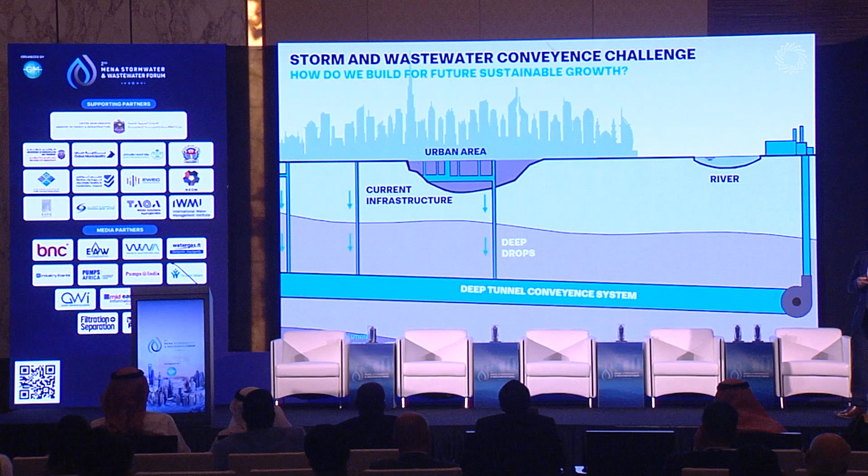So let's go back to the challenge. This is a typical city, and we may in the city have a challenge of increased wastewater production and increased stormwater production. And the existing current infrastructure is just now unable to cope with that increase. So the solution, as we've already heard today, is that we need to drop it deep into deep tunnel conveyance infrastructure, deep below the city. And then we rely on gravity to do the rest of the work, to bring it to the treatment plant, and bring it back up to the surface for effective and sustainable treatment.

These tunnel systems are being deployed all over the world. We worked on a project with the London Thames Tideway project, for example, with up to 30+ wastewater treatment drop structures. We heard about the Dubai strategic sewerage tunnel system earlier in the talk. And in Hong Kong, very significant stormwater infrastructure with flow rates of up to 210 meters cubed per second have been built.

The challenge, however, is when you uncontrollably release this water through a deep drop, the energy contained in that water is absolutely significant. It's explosive and it can do significant damage if not controlled. In fact, we've done some analysis and it shows that even a small drop structure, the energy dissipation is equivalent to that of detonating tons of TNT every hour.

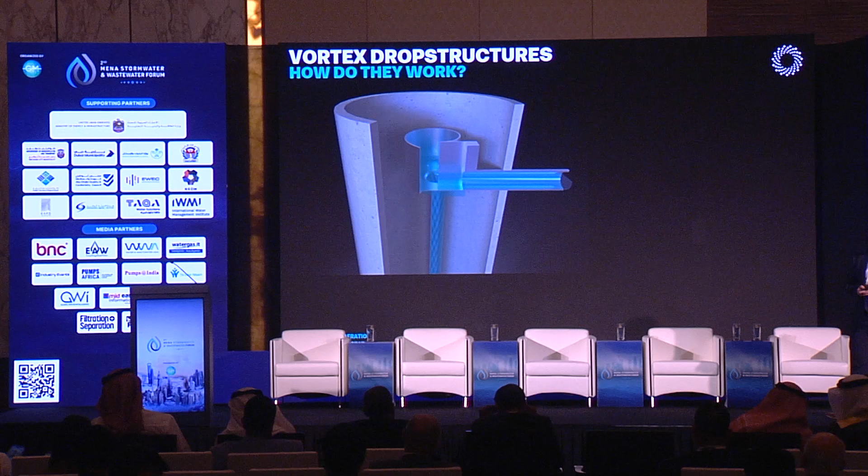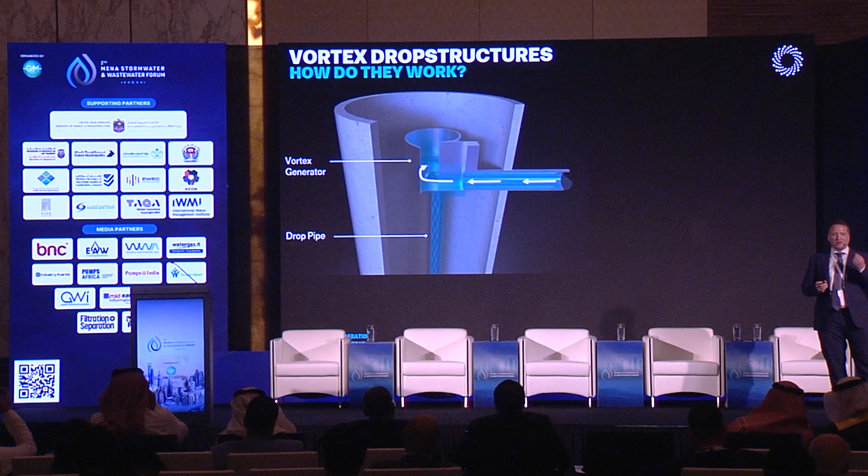So how do we manage this? How do we manage the chaos? Well, we do what nature does, and we organize the flow. We create a vortex. And a lot of you in the room will be familiar with this type of technology called a vortex drop shaft. And what we do to take this uncontrolled flow and get it organized, we convey it into a vortex generator. What the vortex generator does, it allows us to speed up that water. And then we convey it into a drop pipe.

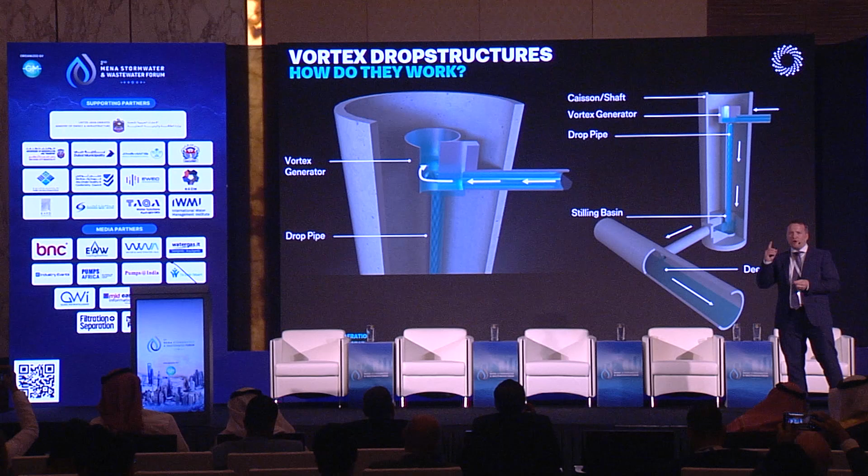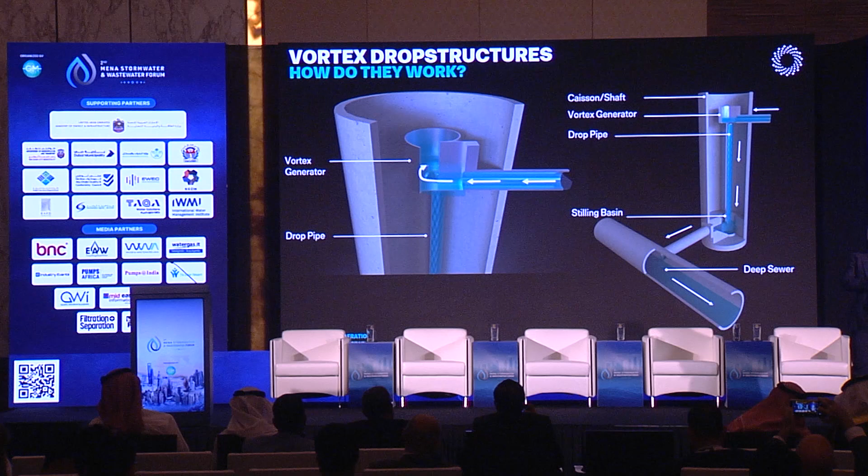Now a particle of water, as it moves into the drop pipe, is at high velocity speeds, and it exhibits a centrifugal velocity, or centrifugal force. And as it's traveling down this drop pipe, it stays on the drop pipe, and the high velocity and frictional effects result in very, very effective energy dissipation. We're talking up to 70 or 80% of that originally explosive energy is now dissipated in the drop structure. So this is what enables the sustainable development of deep sewer systems.

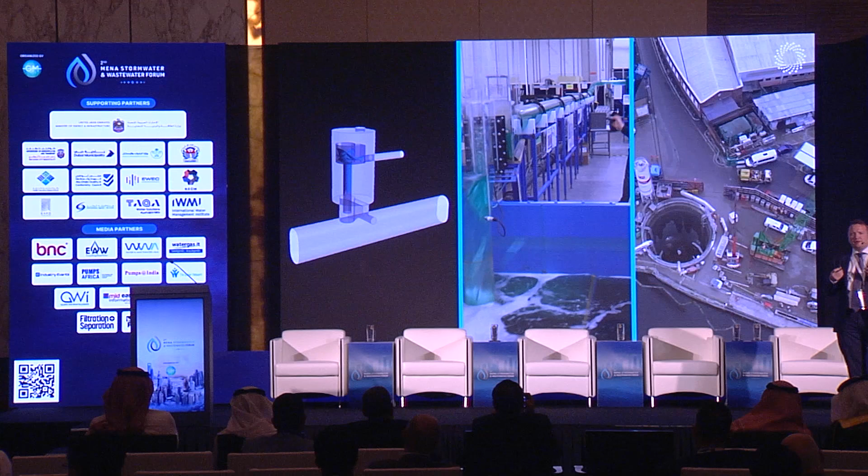The flows are relatively complex, so we need to use technology and tools to assess the performance of these systems. This is computational fluid dynamics on the left, but also we need to sometimes combine that with physical modeling to really provide insights and de-risk the designs to get it to a place where we can be very, very confident in the long-term operation of that infrastructure for the next 100, maybe 150 years.

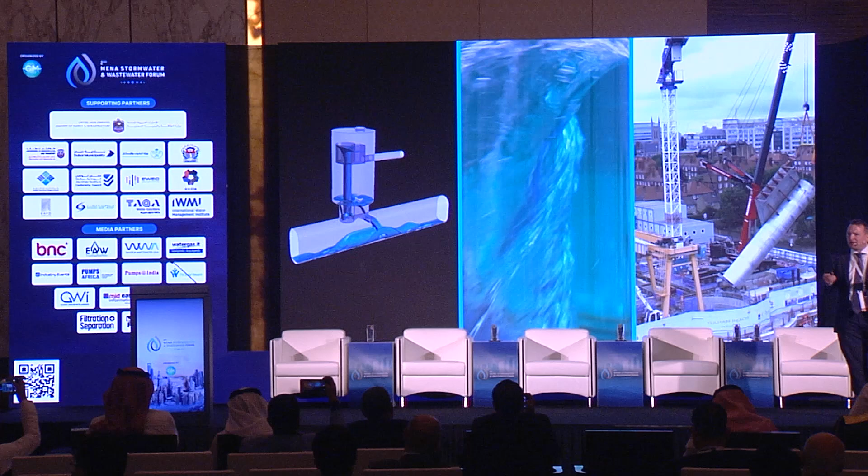So what I'm really excited to talk about now is what's on the left-hand side of the screen. We've now managed the stormwater and the wastewater, but now we have to deliver to a treatment plant where there's a whole host of new challenges. The main challenge primarily is we have huge volumes of wastewater that we need to now get to a better quality standard to enable water reuse. So we now have to do more treatment of more volumes of wastewater in existing aging infrastructure.

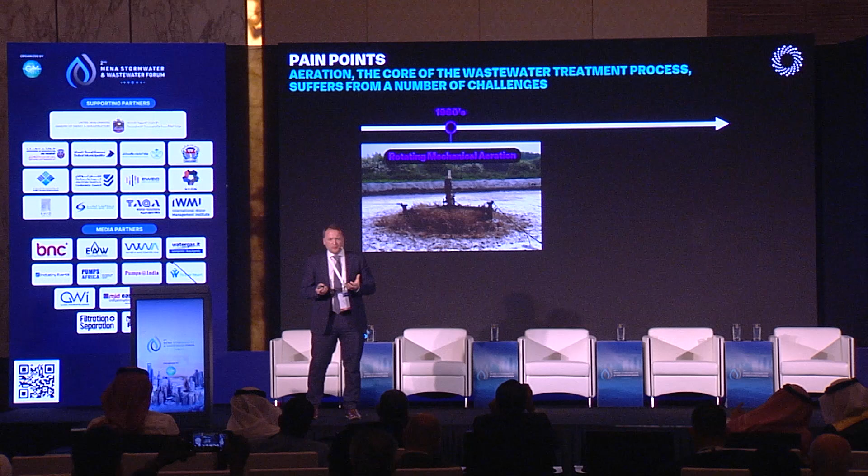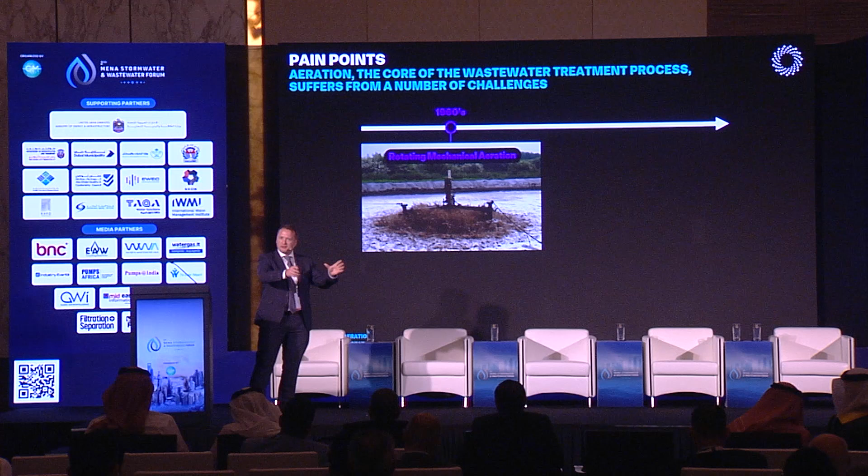And if you look at a traditional wastewater treatment plant, the heart of the treatment process is biological treatment, as a lot of you may know, using the aeration process. And on the screen behind me, you have what might be considered the first generation technology for aeration. It's called surface mechanical aeration. And the good thing about this technology is you can touch it, you can access the technology. But that's because you also need to maintain it. And it's also energy intensive.

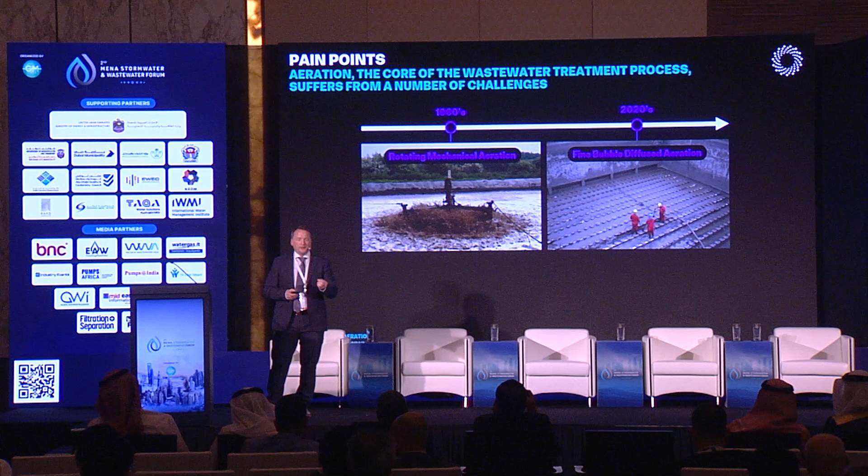Then you might have what's called the best-in-class technology, which is fine bubble. And the fine bubble is effective because it's efficient. However, the challenge is how we deliver that fine bubble today. We do it at the bottom of a tank through a diffuser. And diffusers inevitably clog, they foul, and eventually they break. So in many ways, it saddens me to believe that we're doing all this effective innovation and investment in the sewer system to bring the water to a tank where we have over 1,000 potential failure points for that system.

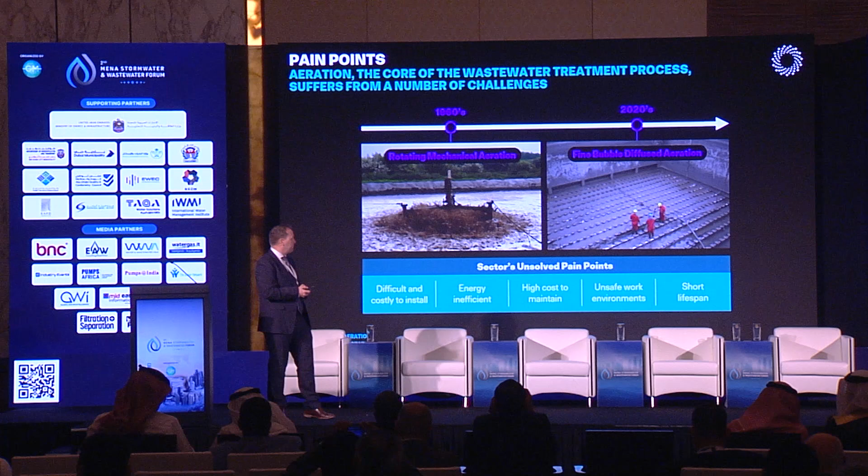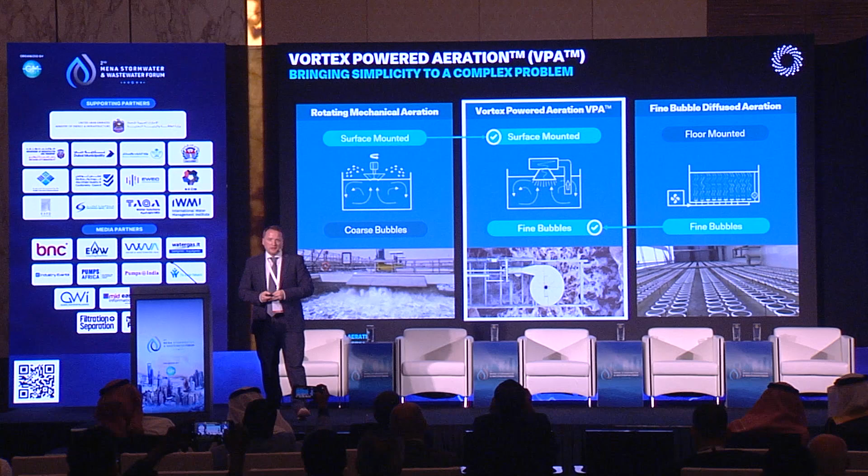But what if we could generate the same fine bubble that makes fine bubble systems so efficient, whilst eliminating the complexity and the maintenance headaches associated with other types of maintenance-based, floor-based technologies? And that's what Vortec have done. We've harnessed the power of the vortex flow to get the best of both worlds. This is a new class of technology called vortex-powered aeration. And essentially what we're doing is we're taking that same flow phenomena that I showed you in the video, and we're compacting it into a single piece of product, which is shown here on the screen behind me.

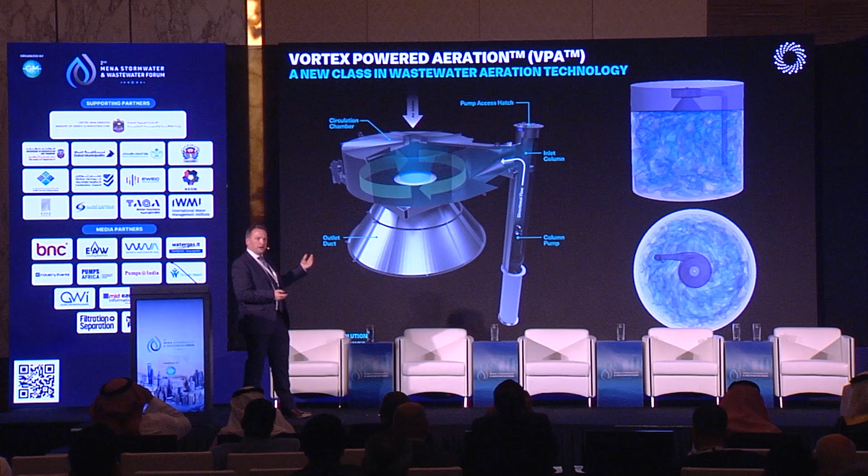We're pumping the water, the activated sludge, into a vortex. We're spinning up that fluid at a high speed. And as I mentioned, we can get some amazing air-water flow properties. So we can generate significant amounts of air entrainment without the need for blowers, or civil works, or blower rooms, or pipe work. The air and water is mixed together and it creates a fine bubble plume, and as you can see in the computational fluid dynamic simulation, we can create full mixing and oxygen transfer across the depth of a tank with the solution.

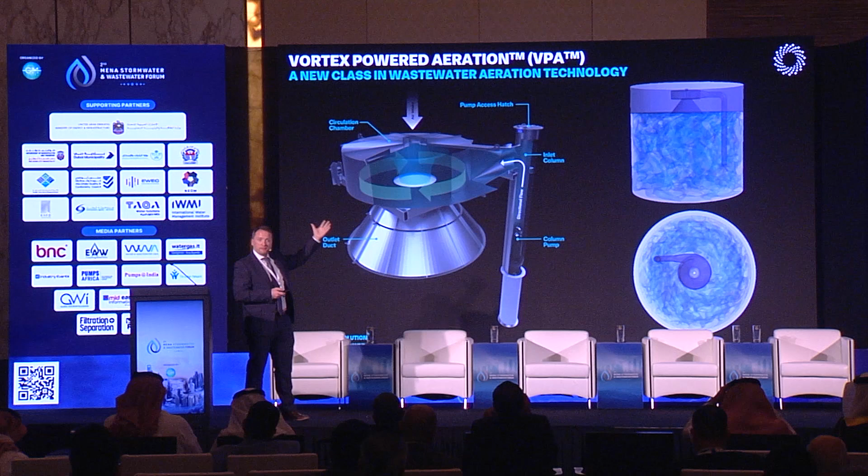But best of all, the solution can be fitted to the top of a reactor, so it can be accessed, and the overall aeration system can be maintained within 20 minutes by accessing a single hatch and lifting the pump for inspection. This technology has been proven. We have technology adopted with the leading utilities in Ireland, in the UK, and more recently in Australia. This year we will do a 250,000 population equivalent upgrade.

And we've also coupled this technology with the latest digital solutions. So we can predict maintenance, we can predict biological system health, and we want to get this to a place where artificial intelligence is going to be able to optimize in real time the overall biological process to ensure the maximum efficiency and sustainability.

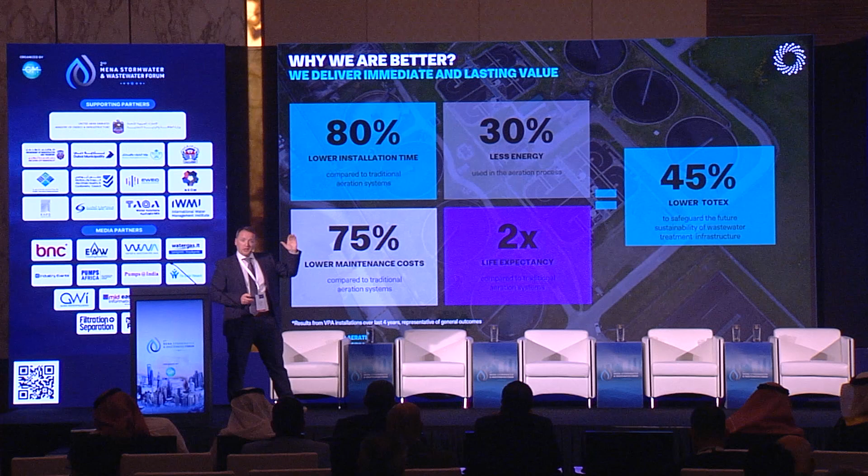The benefits are very clear. We can install much quicker than conventional technologies. We reduce energy, we transform maintenance. But most of all, we have designed this technology like the vortex drop structure. We designed it to last. So these benefits are more consistent and last twice as long, ultimately significantly reducing your total life cycle cost of your wastewater infrastructure.

So, where I started was, can nature help us? And we're confident that nature has at least helped us with one problem, and that's being able to manage stormwater and also treat wastewater.